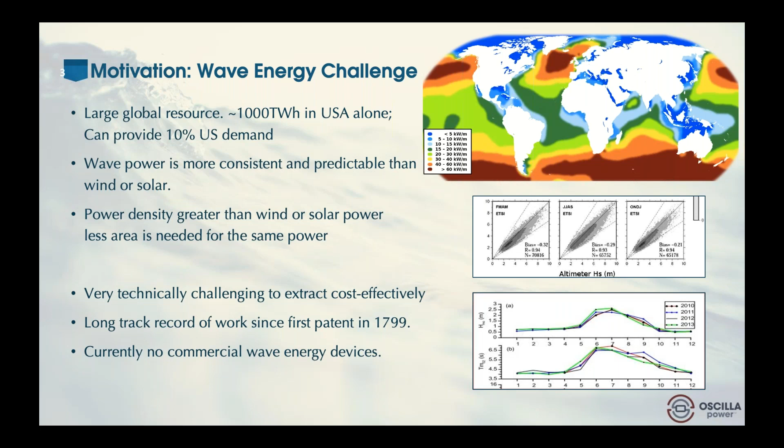Now, a little bit about Oscilla Power and how we got here in terms of technology. As mentioned, we were started back in 2009, and actually the NOAA Phase 2 SBIR award was one of the very first awards that we got to develop our technology. And a lot of things have changed since that point, so I'm not really going to focus too much on that award or what was found during that award. I'm more going to talk a little bit about what we've done since and some of the interesting things that we could be doing going forward.

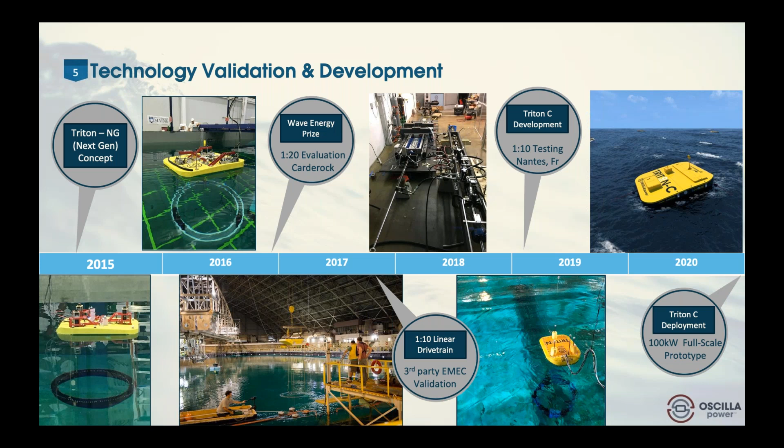So this is the 100 kilowatt community scale system. Scale is a little arbitrary when it comes down to wave energy devices, but ultimately we're referring to the average power that the system would produce in a maximum case, a little like a rated power for a wind turbine. Now this system we're currently building, its size is around about 10 meters by 7 meters. In the image on the right there, you can see the architecture that's across all the different sizes of device, which is the surface float with the 3 lines that connect to a ring-shaped reaction structure.

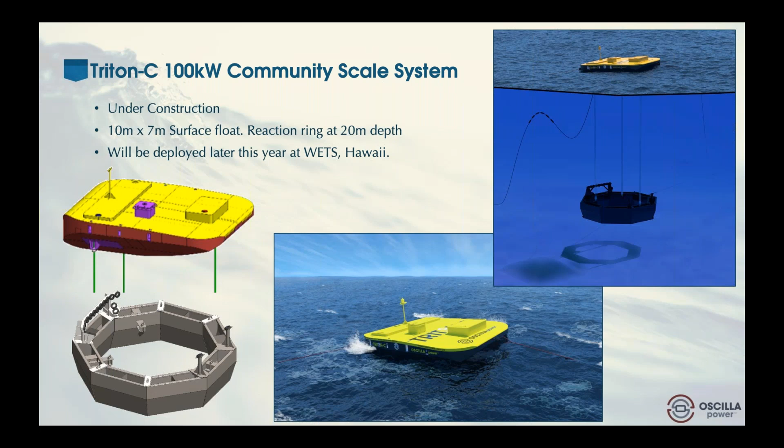But what comes next after this is in many ways the primary objective for us, which is a larger utility scale system, which would be a megawatt size wave energy device. Now this is the Triton, where the prior unit was called the Triton C. They share exactly the same architecture. There are a few things that are different. Obviously the size. This is 3 times larger physically. It's designed to be installed in arrays of devices, just like a wind turbine or solar would be installed in arrays. And the goal here is really to be able to achieve cost-effective, large-scale wave energy.

There are a few things that you need in order to get to that point, and one of those, as anybody who's got experience with the ocean would realize, is that you have extreme conditions that you have to survive. And the Triton system has an integrated survival and also load shedding mechanism, whereby it ballasts the float. The yellow structure there is ballasted so that it sinks down in extreme waves just below the surface, as you can see in the images at the bottom, and mitigates all of the loads on the system.

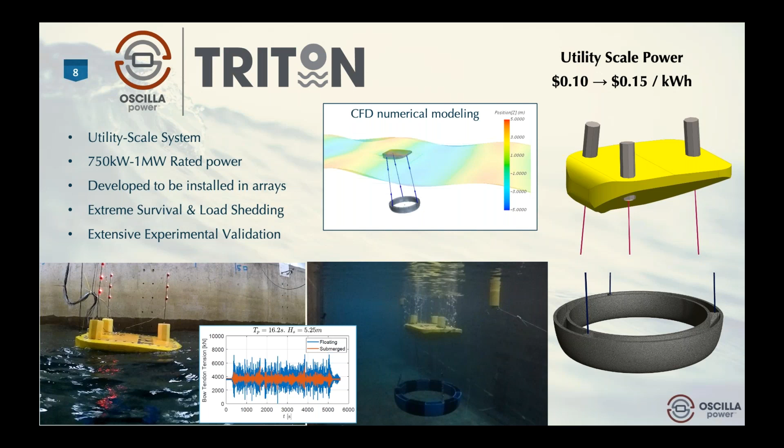So what does that mean in terms of roadmap? Well, Oscilla has been focused on larger scale systems to date. There's the 100 kilowatt Triton C, which you see here in green in the center, and then on the right there is the blue, which is the utility scale system. We've been progressing these tracks in parallel. The hashed areas is work that's being completed, and the boxes are drawn around tasks that are currently in progress through federal awards that we have right now.

But what I wanted to talk about today was the left of the slide, which is looking at smaller systems, very small relatively, and looking at what's the viability and opportunity in that space.

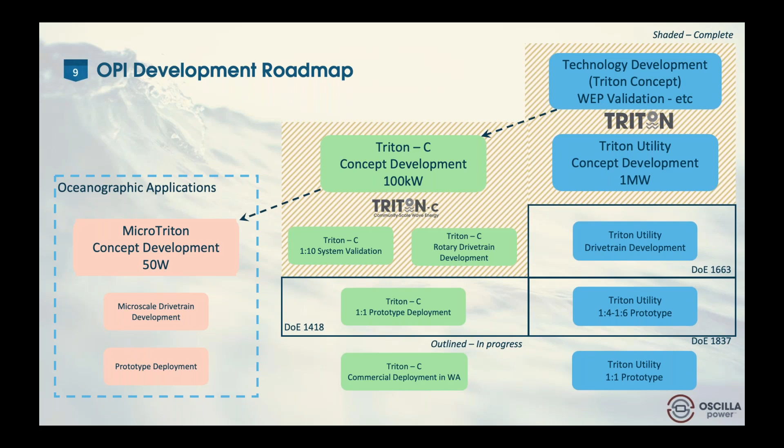And what's of particular interest is the ocean observation, oceanography area, and I thought that would be relevant to talk about in a NOAA presentation such as this. So these areas might include ocean sensing, ocean observing, climate change measurements, etc. In fact, to be fair, I don't know, and I can't really imagine the sort of opportunities and sensors that would be used.

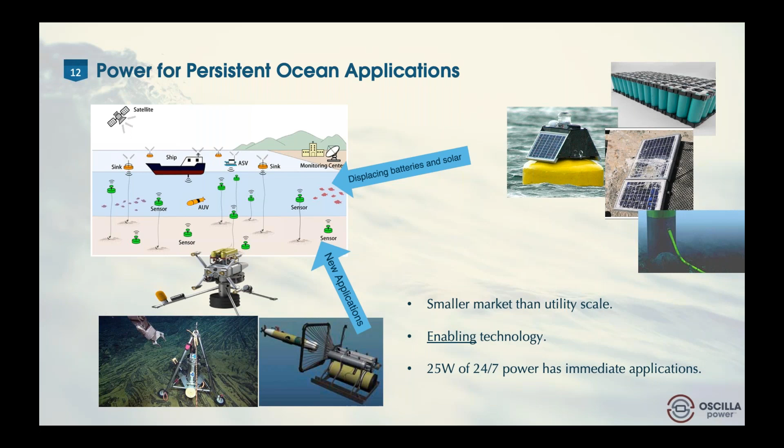So I'm going to take a slight detour now, bear with me. But for those on the call that are not intimately familiar with the ocean and waves, there's just a couple of things that I wanted to highlight. It'll help in a subsequent couple of slides. So just a little bit of background here.

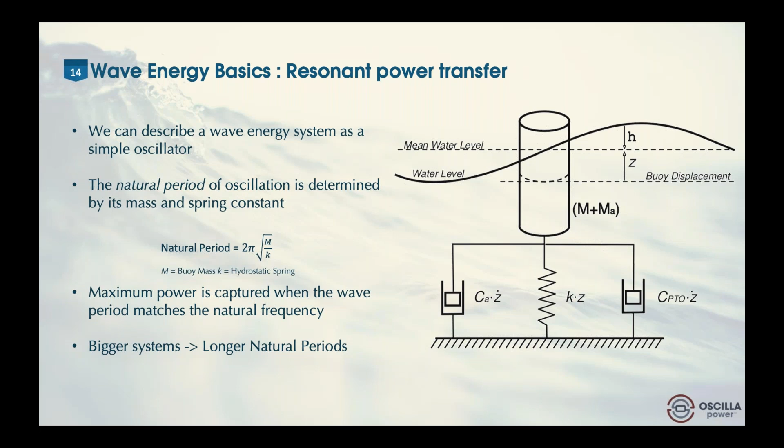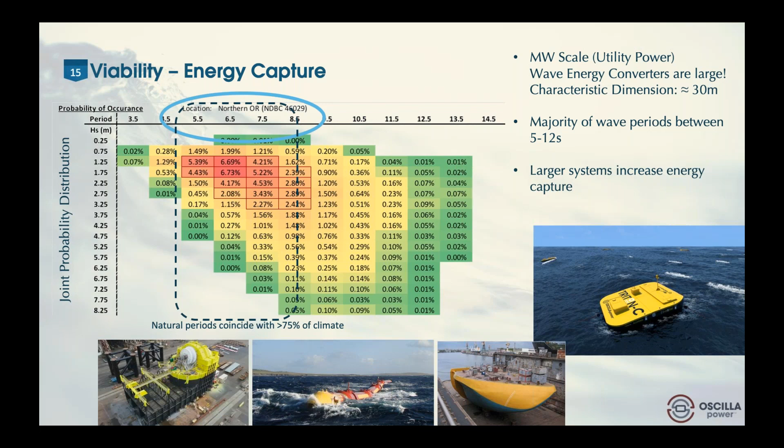So these larger systems, they capture a lot of energy because they're bigger. And so those two factors together mean that most of the focus to date has been on producing big devices that produce lots of energy. But what if we wanted to talk about smaller size? There are some specific challenges that are directly related to that mismatch in natural periods.

The problem is that when you build something small, and when I say small, I'm talking about the sort of size that I was referring to before, say about a meter or so, you get very short natural periods, which are shorter than the waves that exist. And so the amount of energy that's captured is very small. So that means you need to come up with different ways of being able to capture, or how do you design the device so that its natural period is longer than it would otherwise be.

But that's not the only thing. There are other significant challenges. There's a lot of relative motion between bodies as well when they're small, and that's difficult to manage. Plus, static and dynamic friction becomes a very large proportion of the energy that you're capturing. But there are still advantages here. There are far more manufacturing options available. It's faster to test. It's probably harder in many ways to develop a small device that produces tangible amounts of power than it is to produce a large device, in my opinion.

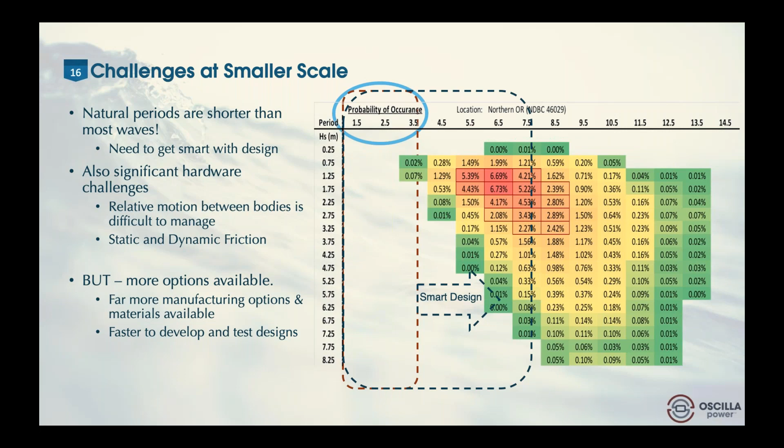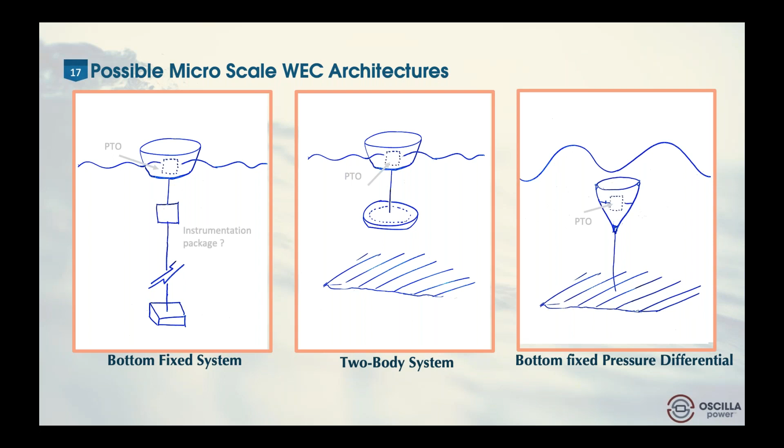So I wanted to investigate this, and so we went ahead and we developed a microscale wave energy device because we wanted to explore the magnitude of power that we might get out of this. So I'll admit we actually repurposed a small scale version, a scale model that we developed to represent one of our largest systems, and inside it we implemented a different drivetrain that was able to have a lot of relative motion, and effectively the system should act just like a complete self-contained wave energy device.

Now, as I mentioned previously, the natural periods of these systems of this size are quite short. In this case, this system had a natural period of 1.5 seconds. And we then tested this. We were fortunate to get support from Marinet in Europe, and we tested this system in real ocean conditions, but in a tank. So we tested up to 0.5 meter wave height. Obviously, we couldn't do any bigger than that in the tank, but we tested in up to 0.5 meter wave height with appropriate periods that would represent full-scale conditions.

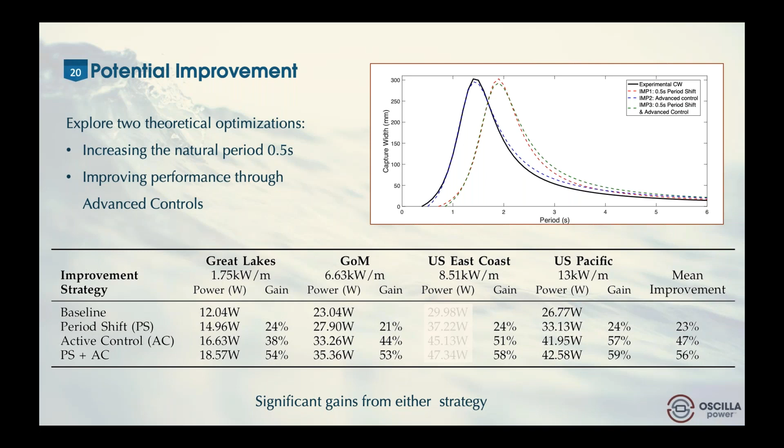And some of the future work that we plan on doing really looks to use genetic algorithms to optimize the geometry of the floats in order to get that natural period moved to get more performance out of the system. I'm working with some people to look at doing that. We'll start this summer. Shortly afterwards, we hope to do some work looking at a very small scale, very long travel drivetrain and testing that in the laboratory.

And then that will spur construction of actual true microscale wave energy devices, which we can test. Big advantage, of course, here is that we can do it very quickly. Once we've developed the concept, it's very quick to iterate, and we can come up with a concept, build it, and put it out there very quickly.

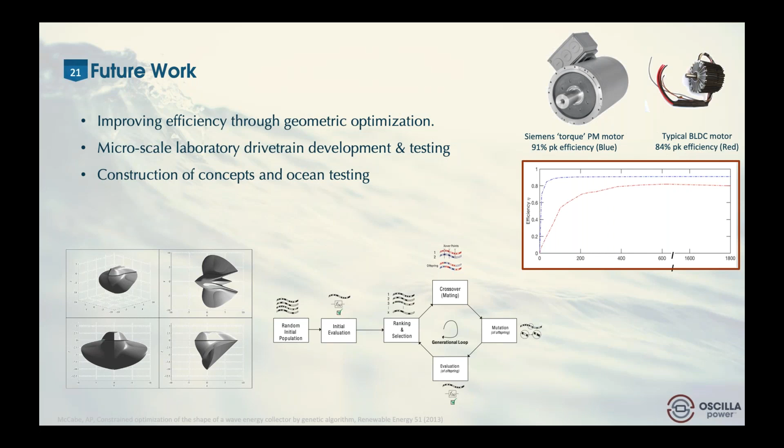So in conclusion, what I wanted to highlight here is that a microscale wave energy converter of the sort of size that I described can provide around about 20 watts continuous power, and that power is somewhat independent, not completely, but somewhat independent of climate. That's even available in low energy climates where we would never typically have considered wave energy previously. There are opportunities for further improvements. All I'm doing with this work has suggested that this is a range of power that we can expect.

The size of the device especially allows for rapid design iteration. One of the challenges that we see when we're developing at a utility scale is that these devices are very big, very expensive, and have very tough risk tolerances. That means you've got to be absolutely sure before you spend X million dollars on building a prototype. For something of this size, there are new techniques in rapid prototyping that you can bring to bear, and you can put something in the water with very little risk.

And as a result of all of this, I feel like we have a real potential to be an enabling technology and open up the door to new measurements, new ocean science, all across the globe. And I want to leave it there, because at the end of the day, when I say enabling technology, being able to develop a way of providing power is just one step, and then the community and the industry and the science would take it from there.